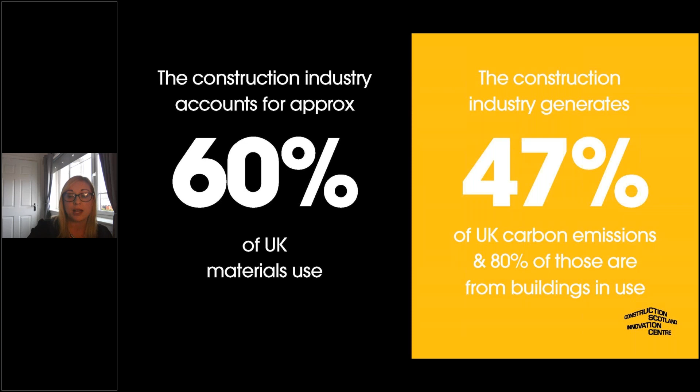And really, when we move into the next chapter of our delivery within CSIC, the net zero carbon agenda at a government level is absolutely crucial and core to all of the activities we take going forward. When we consider our impact within a net zero carbon potential, we see that construction, our sector, uses 60% of the materials, but also creates 47% of UK carbon emissions. So if we change just a little bit, the impact in a positive way could be a lot.

We have 4 different streams of activity: digital transformation, advanced manufacturing, building sustainably, and culture. We see these as the core pillars that underpin net zero carbon change for our environment and for our industry. Some of our activities take a different shape and form depending on the nature of the needs.

Our connected ecosystem, very much so around the network that we've been establishing over the last 7 years, and using our network in Scotland, UK and beyond to really push industry in the right direction and open up opportunities for everyone. Collaborative projects take the shape and form of innovation funding that we have that's available to apply for. Again, industry-led, but we buy out the academic expertise with one of Scotland's universities to support the progress of your project.

The Innovation Factory we have in Blantyre, whereby we are unlocking accessibility to a number of pieces of equipment centred around off-site construction and sustainable materials. And that equipment is available for everyone and can be used by way of commercial funding, finance, or through funding from other sources. So we can create a position of being a research partner if you are going for larger bids, and draw on our expertise within the Innovation Factory to progress your innovation projects.

And Future Skills is really supporting our industry to move in the right direction and address some of the skill shortages, in addition to some of the commercial challenges we have in keeping our skills where they need to be, whilst filling the gaps and some of the new skills that are developing with the change and progress of our industry.

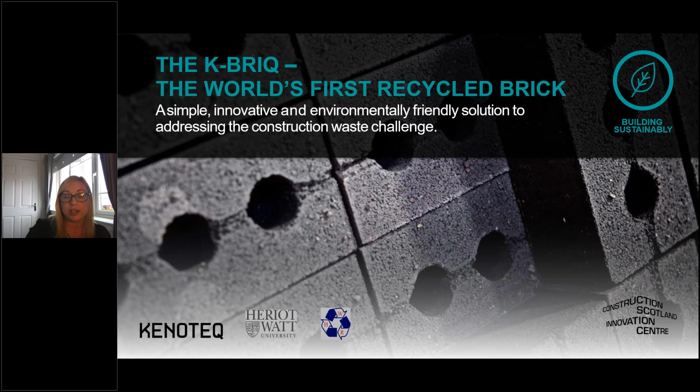Some examples of our work: the K-BRIQ you may have heard of. It's had quite a lot of publicity. It's a brick made from 90% recycled, difficult to recycle materials. It's not fired, so there's significant carbon savings, and at end of life it's very circular. It can be broken down and created into a new brick, something that could really revolutionise how we build.

Offsite Solutions Scotland is a collaboration that was set up with a number of Scottish businesses operating within the offsite capacity, bringing them together to share the risks and reward for joint research and development projects, but also positioning them with a longer term view that they could collaborate as one business and move forward into international markets.

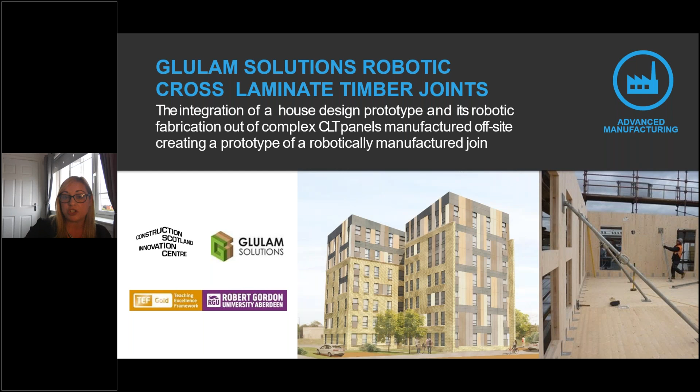Glulam solutions and robotic cross-laminated timber joints. We talk a lot about cross-laminated timber in Construction Scotland Innovation Centre. The reason being that unlocking the timber market in Scotland would have significant impact commercially, economically, and with the creation of a number of jobs. So we like to encourage projects with cross-laminated timber, testing the boundaries, testing Scotland's process to build. And this was actually the 7-storey flatted development in Yoker, Glasgow, using CLT and demonstrating how we can make this work in a Scottish capacity, but within a global marketplace.

Remote building inspection framework, very much assessing the developing needs of our industry, how we can be more efficient and impactful with our time and resources, but also acknowledging where we were within a COVID capacity and what can be done relative to BIM and remote working with more precision and accuracy.

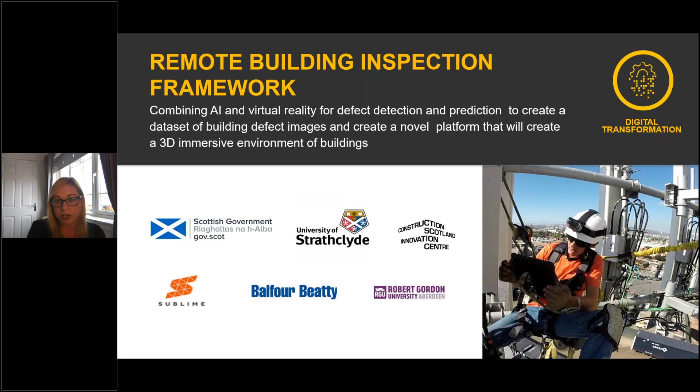COVID Smart, really a reaction to the COVID pandemic, whereby we created a resource centre where we could support our industry in moving forward as the change in regulations and change in restrictions came into play. And this is something that's still up to date and it's still open for all our industry to access as a resource bank, helping them decide what to do next and how to manage their operations appropriately.

And as you can see, we run a number of different types of projects, touching on a number of different themes. On the back of today's theme of flood defence, we would like to do a lot more within this infrastructure, and we hope that today showcases what can be done in a practical sense, with scope for future projects in an innovation capacity.

And just moving on to today's agenda, we are joined today by the McLaughlin Harvey team: Lee Davison, Head of Submissions; David Baskin, Senior Contracts Manager; Robin Erskine, Senior Contracts Manager; Adrian Pollock, Contracts Manager; and John McCreary, Senior Technical Manager. As I noted, unfortunately Dr. Valerikis has had to send his apologies, but we do have the presentation at hand and he will be able to answer any questions specifically on the water lab and the operations he has there.

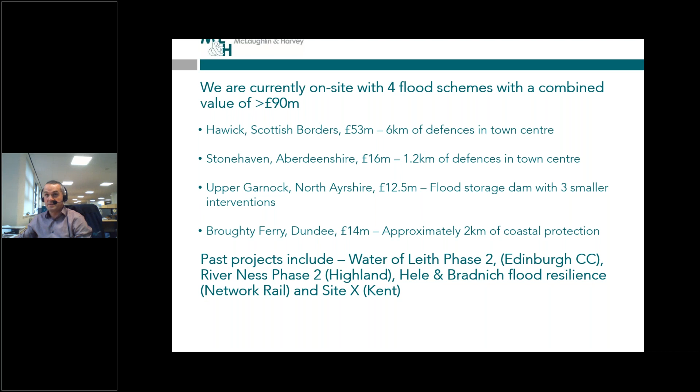So very quickly, a couple of slides just about McLaughlin & Harvey for those who may not know who we are. We're a privately owned building and civil engineering contractor. We've been around for just under 170 years, 700 odd employees. We have a turnover in the region of 500 million, 100 million or so of that is made up by civil engineering. Civil engineering team headquartered in Belfast, operating on projects throughout the UK. We also have facilities in London, Bristol, Liverpool, a major office in Glasgow, which a lot of the Scottish attendees here probably know, and a smaller office in Edinburgh.

As to what we do, as I said, predominantly construction, major building construction, civil engineering, but a little bit of facilities management and some specialist parts of the company. In terms of sector involvement in civils, subject to today, river and coastal flood protection schemes. What we're predominantly known for, and probably makes up 60 to 70% of civils turnover, is heavy marine civils in ports and harbours, a little bit of roads, a little bit of rail, and then on the building front, predominant areas of industrial, health, education, retail, sporting venues as well, a bit of residential.

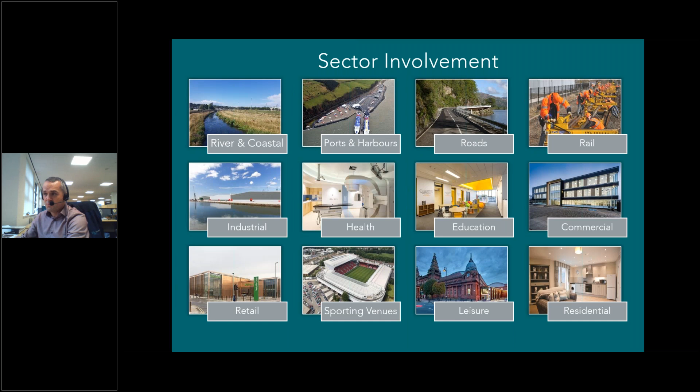Just to give a flavour for the sort of projects we have on the go, obviously the 4 projects we'll be speaking about today, and we're delivering projects all the way from Stornoway down through Scotland and England down to quay wall strengthening at Felixstowe. So we have a broad geographical spread around the country. So that's enough about us, and I will hand you over to Robin. The idea being we're going to run, broadband speed allowing, a quick drone footage of each job taken within the last couple of weeks, and then Robin will run through some of the points raised on the project.

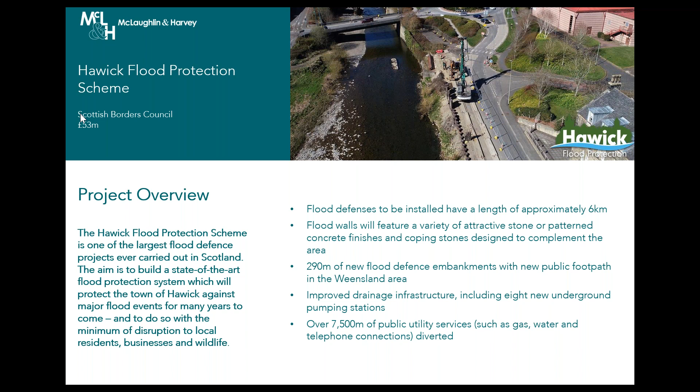The scheme involves construction of approximately 6 kilometres of new flood walls, generally sheet piled core with reinforced concrete pile cap and concrete stem wall, which is then cladded in various finishes of stone and concrete, etc. There's 3 new footbridges in the town to replace 3 existing footbridges, which link both sides of the river within the town. There's improved drainage infrastructure. There's 8 new surface water pumping stations to be constructed within the scheme. There's a new Scottish Water pumping station being constructed.

There's an upgrade of part of the A7 trunk road, which runs through the town, and lots of different bits and pieces that are basically going to make vast improvements to the town of Hawick. So this is just a bit of drone footage that was taken about a month ago.

This is the lower downstream end of the town, where we are currently working on both sides of the river. You can see there the abutments being constructed for a replacement of that footbridge that you see. That's an existing footbridge. New footbridges are being raised. You can see on the left-hand side there the flood wall construction is underway and ongoing.

You can see there's 2 large diameter pump chambers on the left-hand side beside our office and our compound there. That's one of the surface water pumping stations, one of 8 on the scheme. As you come on down, this is the Mansfield Road, Lower Mansfield Road in Hawick.

You can see on the right-hand side of the road there, the sheet piles have been installed. Haven't been able to install all those sheet piles to design toe level, but we'll come on to that later on. Left-hand side is the existing Scottish Water treatment plant, and where the crane is, that's the location of where we're installing the new pumping station, currently under construction. That's another compound in there that we have as well.

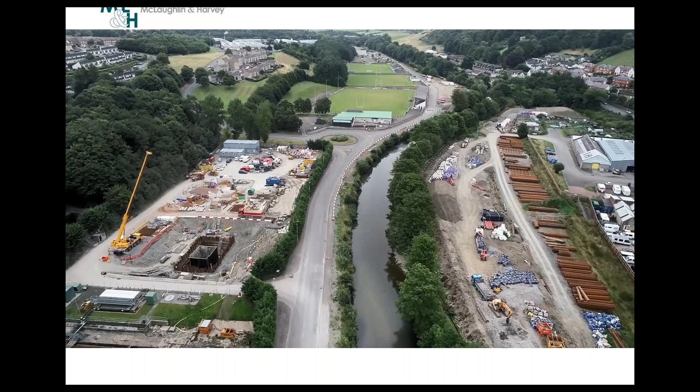On the right-hand side, you can see a large storage area. We've been able to procure all the piles for the scheme last year when we came to site, which is very beneficial, getting them at the right price and getting them to site early. We're also looking at Hawick Rugby Club there on the left-hand side, and the work's ongoing down there at the minute, just involving the outfall to the pumping station.

This is the middle section of the scheme. Apologies, this isn't in any particular order, but seems to have gone there, Lee. We can try and fast forward it a bit there.

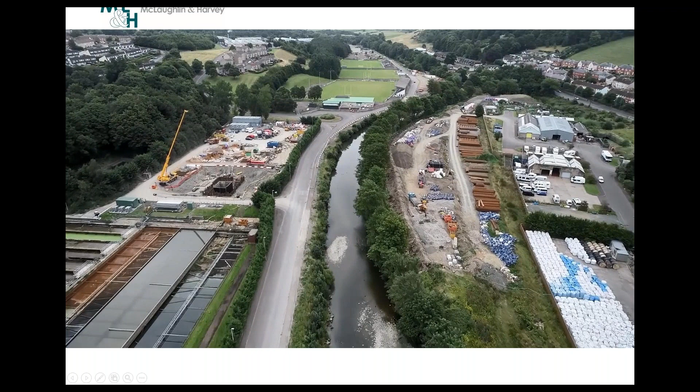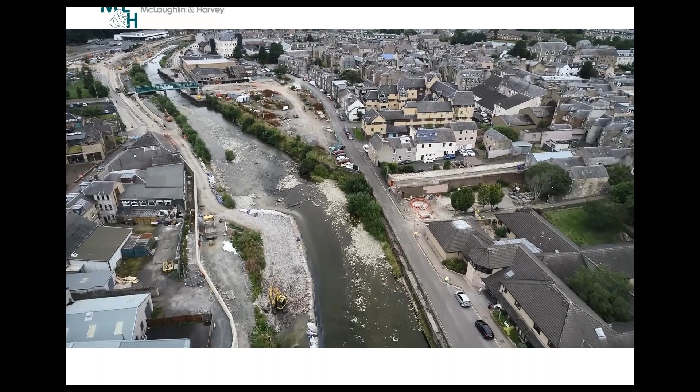Yeah, another wee bit. There's a large outfall from the wastewater treatment plant then down to that compound area behind the rugby club stand there. That work's currently ongoing. This is the middle part of the town, so you can see on the left-hand side, new flood wall constructed and clad in nice sandstone. That flood wall follows the back of the buildings up to Commercial Road, which is the A7 trunk road that runs through the town. You can see in the distance there the new green bridge.

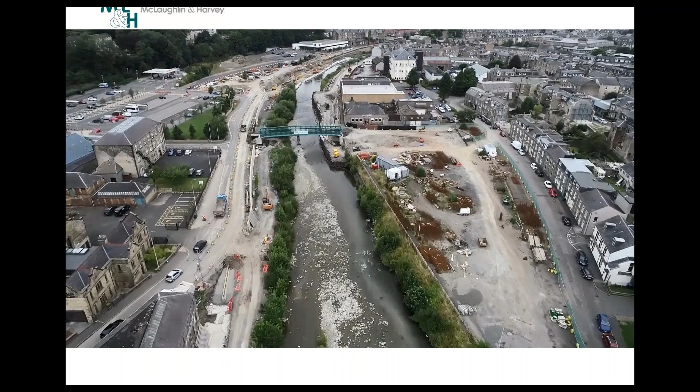That's one of the bridge replacements that we installed on the 26th of July, with the previous bridge, slightly smaller and lower, has now been removed. But there's still a lot of work ongoing just to link that bridge and get concrete ramps and things built and services diverted across the bridge.

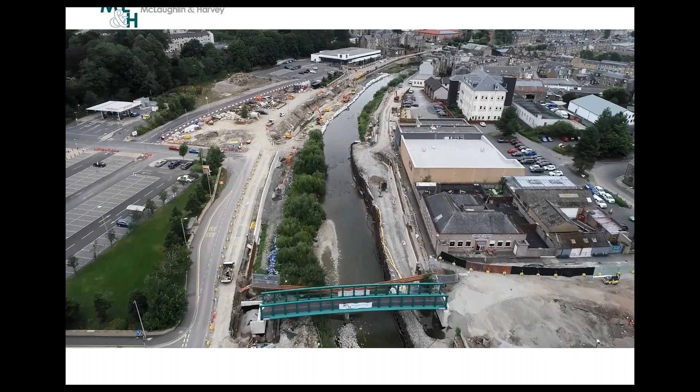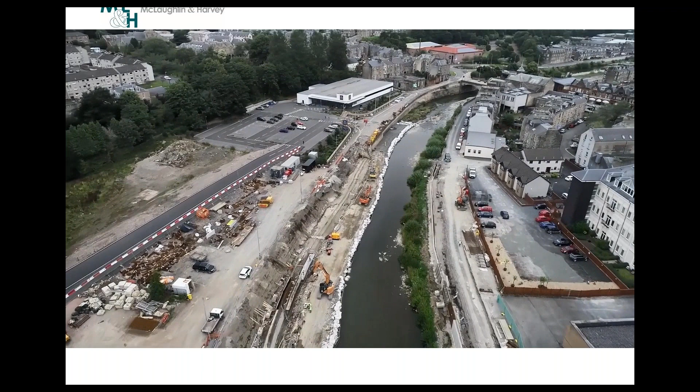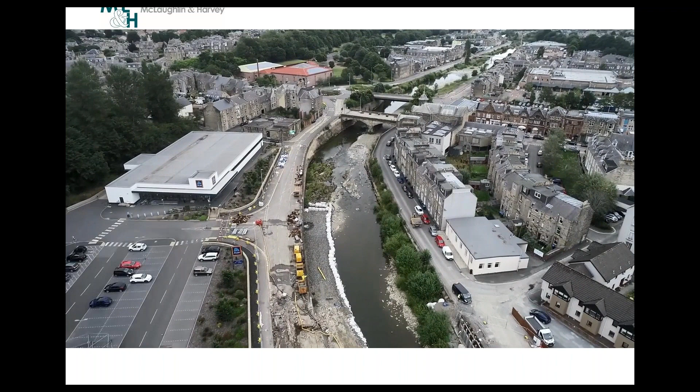Coming into work section 8, which has been one of the most difficult work sections to be constructed in the scheme. On the left-hand side there, it's one of the few areas where the flood wall isn't piled because we're down on bedrock, but there's a deep gravity retaining wall being constructed there at the minute from the river. So there's lots of constraints with working in the river that we'll come on to shortly after. But yeah, that's one of the most challenging areas.

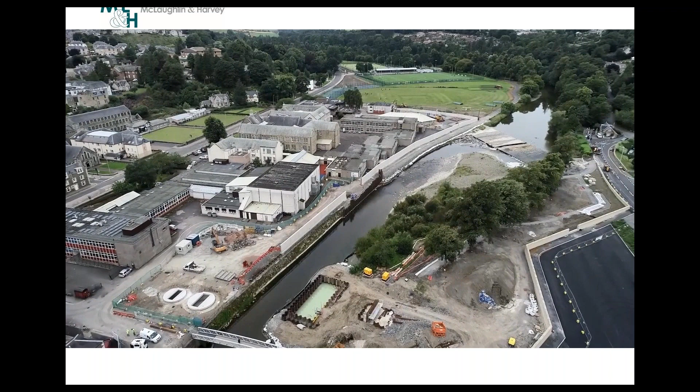This is looking upstream then from that middle section. That's Hawick High School on the left-hand side. You can see the concrete flood wall has been constructed. There's a gap there because there's some additional works to do there next year. But we have that flood wall constructed right round the Hawick High School.

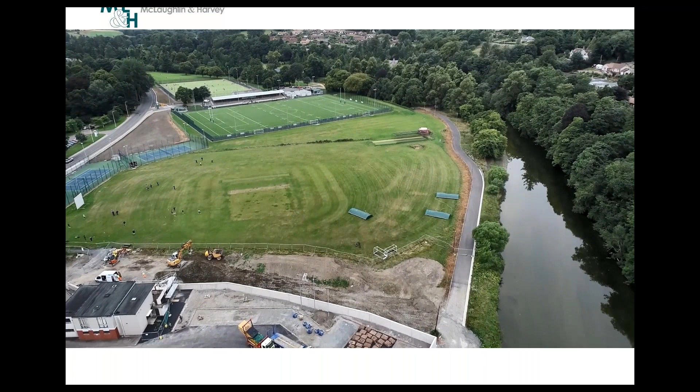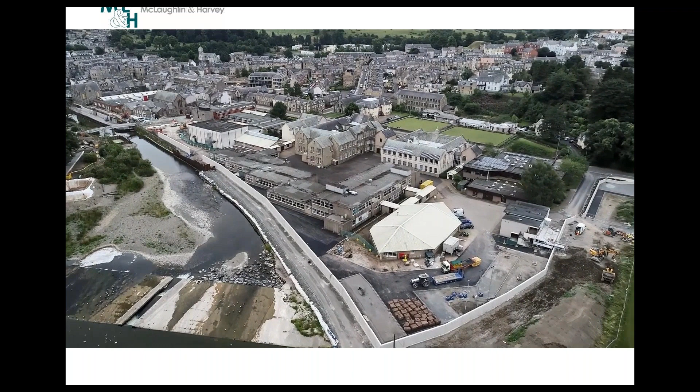This is Hawick Cricket Club. So the wall turns left there at the cricket club. So that cricket club is designed to flood. Footpath where the cursor is there is part of an extensive active travel network supported by Sustrans, which links footpaths in different areas across the town.

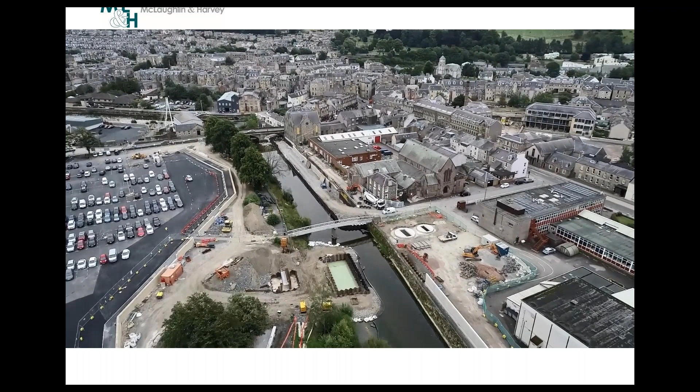That's just looking back the way. On the left-hand side, we've got the Common Haugh car park where we have the flood walls largely finished. You can see a coffer dam in the middle of the river there. That's a central pier construction for, again, a new replacement bridge linking the car park to the school. That's just looking back to the middle section that we've just been through.

If anyone's noticed, there was a building that collapsed in Hawick in February 2020. That's been demolished as part of the scheme as well, or partially demolished. This is the western tail end of the scheme on the A7 trunk road. Flood walls are all complete in there, and we're sort of at the stage of finishing works, landscaping works, some road works, accommodation works around the cricket club, which is just to the left of the tennis courts there.

The cricket stand to go in to basically link the cricket club to the wet side of the flood wall. So to say, that footage is all taken about a month ago, and there's been lots of work ongoing since then. So hopefully that wasn't too quick.

But just in terms of the scheme, it's a client designed scheme by Jacobs. Jacobs are on site with us, working as one big team, and things are going pretty well. We commenced on site in July 2020 with our setups, and construction work started at the end of July last year. So we're about a third of the way through the scheme at the minute, and we have about a third of the scheme actually constructed. We're slightly behind where we had intended to be at this point due to some of the constraints with working on the river. But as I say, we can come on to that.

Several areas, as I mentioned, for storage of materials. The site has also been divided up into flood modelling cells, which allows Jacobs to look at the flood risk management as we build the scheme over the 3 years that we're going to be in Hawick. We've also split the scheme into approximately 40 work sections, which makes it easy in terms of programming and planning our works. It just makes the whole scheme easier to manage from a construction point of view.

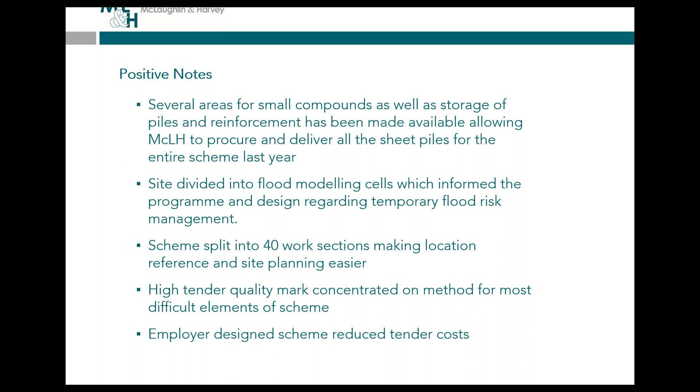High tender quality marks were concentrated at tender stage on methodologies for some of the most difficult parts of the scheme, for example, the work section 8 gravity retaining wall. There was a detailed methodology put forward at tender stage as to how that was going to be constructed. Not saying it's being constructed in that particular methodology, but that was good. And as we mentioned, it's an employer design scheme, so reduced tender costs. Move on, Lee.

Lessons learned in terms of the scheme. As I said, about 35% of the scheme is being constructed from the river channel. The constraints of working in the river channel are quite stringent, with the main works only permitted between the 1st of May and the 30th of September each year.

So we're here for 3 years. It really only gives us 3 summer periods to construct 35% of the scheme, and that 35% is the most challenging part, because we're working in water and we've got all the environmental constraints that come along with that.

So in order to do that, we have to install temporary works platforms. Basically from the 1st of May this year, we were in several areas constructing temporary works platforms for piling rigs and excavators to go in and put piles in and dig out for pile caps and reinforced concrete.

So when you take that into consideration, the 3 to 4 weeks in May to install your temporary works, and then another couple of weeks at the end of September to start taking them out, which is the stage we're at now. We're starting to take out platforms on the river from the end of this week into next week and the following week. It only leaves a 4-month window of actual construction works within the river.

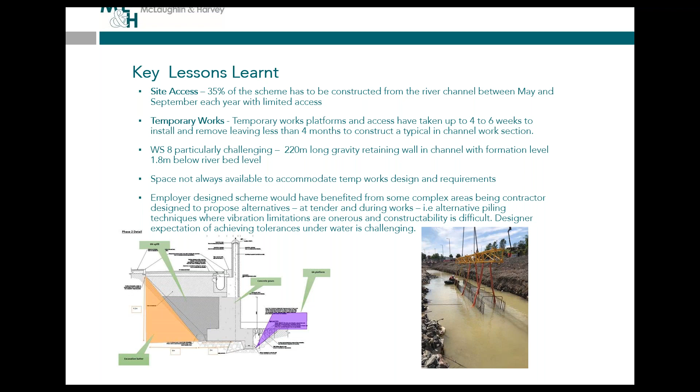As I said, there's lots of environmental constraints as well. The Teviot River is a designated SAC and SSSI, and it's a rich habitat for salmon and lamprey, which I'd never heard of until I came to Hawick. Quite an ugly looking eel type fish, but they're protected and we need to respect that.

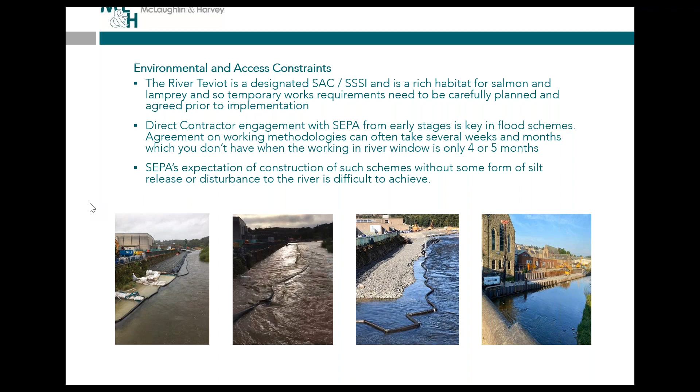And with the installation of those sheet piles, we thought the sheet piles would contain that silt, but the sheet piles didn't contain the silt. The silt's that fine that it's been able to make its way out through the clutches of the sheet piles. So that's been a challenge, and it's been something that SEPA have been on our backs with in terms of managing this and reporting silt and sediment releases into the river, which I have to say throughout the summer there's been several minor silt releases in the town, but when you are digging through natural riverbed material, it's near on impossible to avoid.

There's very stringent vibration limitations within the contract for installing those piles, but it was a real challenge to install sheet piles and stick within the sort of 2 millimeters per second vibration limits. We looked at other piling techniques such as pile pressing, but lack of room to do that and existing ground conditions just didn't make that a possible methodology for installing those piles. So again, areas like that, there are other options for sinking piles and different options that would maybe have less risk of causing damage to the building.

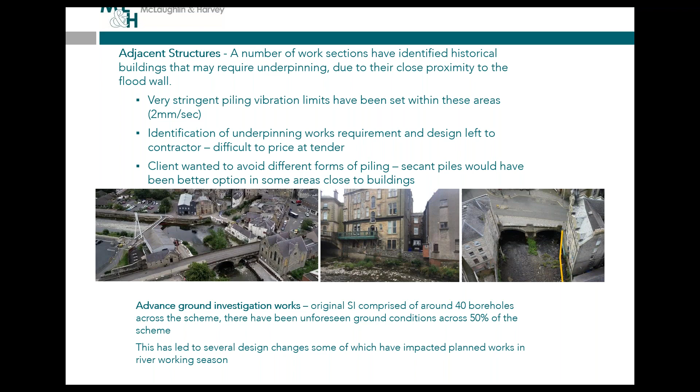Other areas have been redesigned, have required anchor ties into rock and stuff. So, you know, there's lots of issues that I don't know if potentially more site investigation or more boreholes may have picked up on previously at design stages.

Lots of different finishes within the flood wall, as I touched upon. Some of the flood walls are plain concrete finish. Some of them have a Rekli form liner finish, which is like a ribbed, vertical rib pattern. And some of them then are clad in sandstone, like what you can see in the photos attached. The photo on the right-hand side shows some of the walls that are clad in sandstone on one side and plain concrete or Rekli concrete on the other side. So there's lots of different finishes.

And again, the stonework has been challenging too, to get to the expectations of the council's landscape team and the designer's landscape team. It has been quite onerous achieving what everyone expects. The copes themselves have been difficult to manufacture. It's natural stone material. There's going to be variations in colour, variations in the material when the likes of those half-round copes are split. The stone will split whatever way the stone wants to split. So there's been a fair bit of wastage in terms of materials that haven't come up to the required standards and quality.

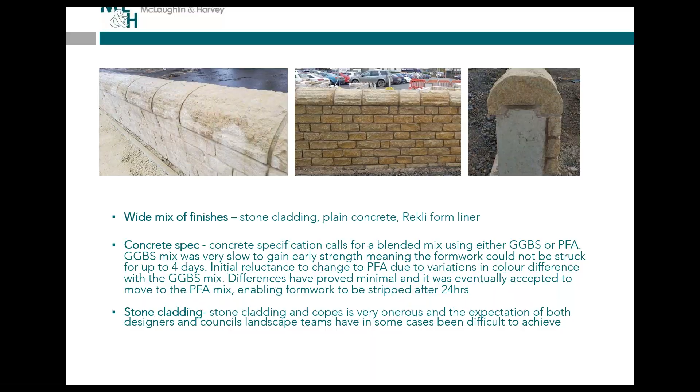But that, I think, Lee, is the last slide. So I'm going to hand over to David Baskin to talk about Stonehaven now. Thanks.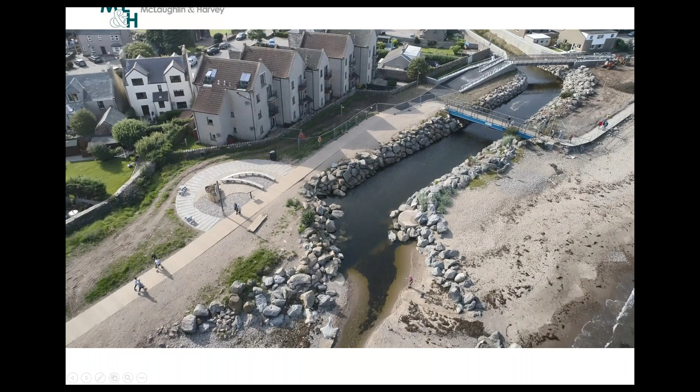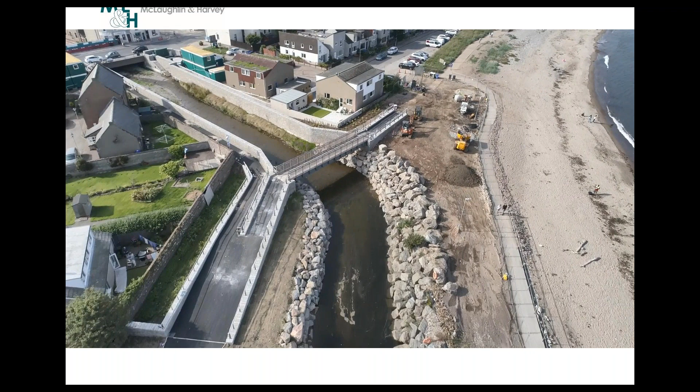Removal of the island downstream of the Green Bridge was also carried out. We installed 2 higher capacity culverts on the Glaslaw Burn up at Lowood Road and the culvert under the cairn. This is a bit of drone footage taken about a month ago. You can see there that first blue structure is a temporary footbridge, and we've also got a 450 pumping main diversion on that while we carried out the main works. This is section 4A by the beach. It's a tidal area as well, which raised some problems when you had winter events and backed up the flood, exacerbated the flood.

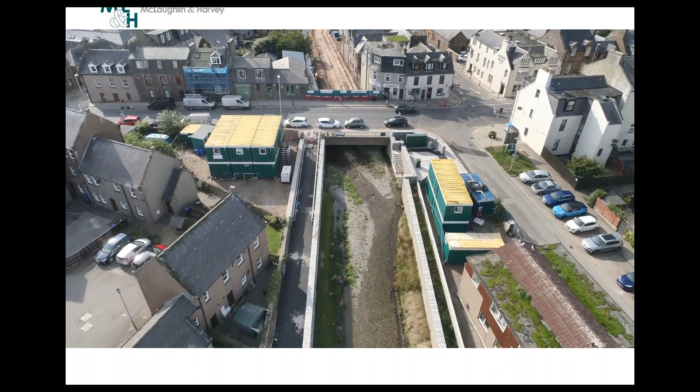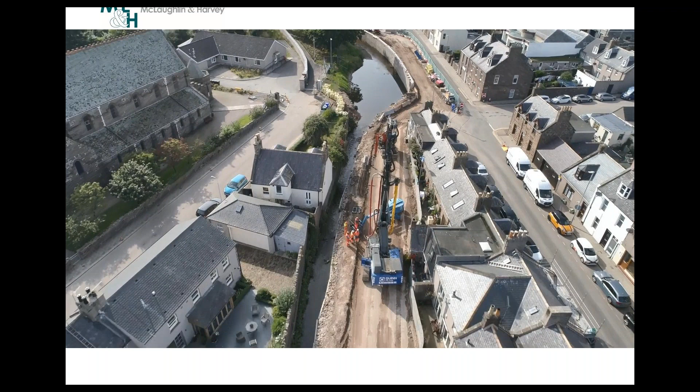We originally had our compound where the Aberdeen bypass site was, and then we moved it down into the town. We're just coming through section 1B now, which suffered some delays. And we started piling in there. It's a very tight area. You can see the kind of space you have with the 55-ton rig.

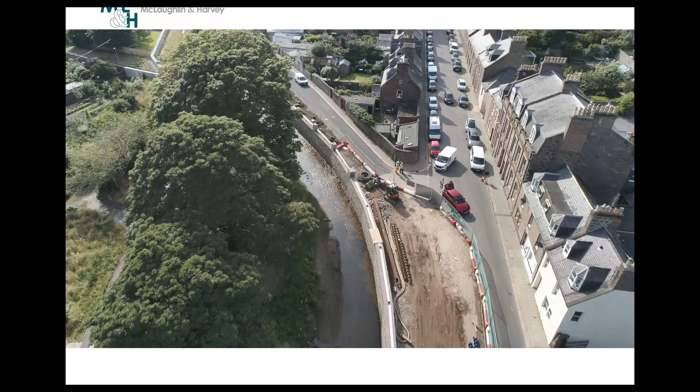The white bridge is just where those sandbags are. That'll be constructed when we complete 1B. We're moving up through section 1C now. There's a number of glass panels and self-raising barriers as well. The walls themselves, some are gravity and some are piled structures. It's quite a narrow corner.

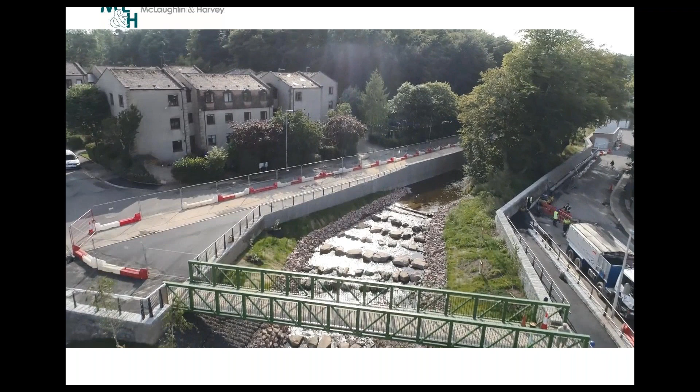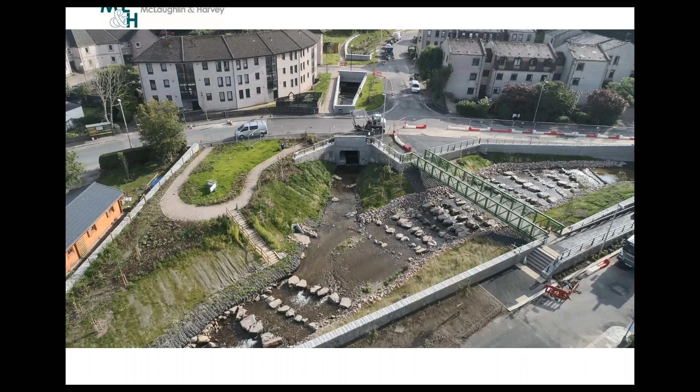This is the intersection of the two streams here where we put in the new green bridge and the flow control structures. You can see those rocks there are dowelled into concrete beams cast in the riverbed. The wall closest to us there is sheet piled, with a capping beam and RC stem wall. The walls are clad in a granite material by and large, and then there's some Reckli formliner concrete finish as well on the culverts.

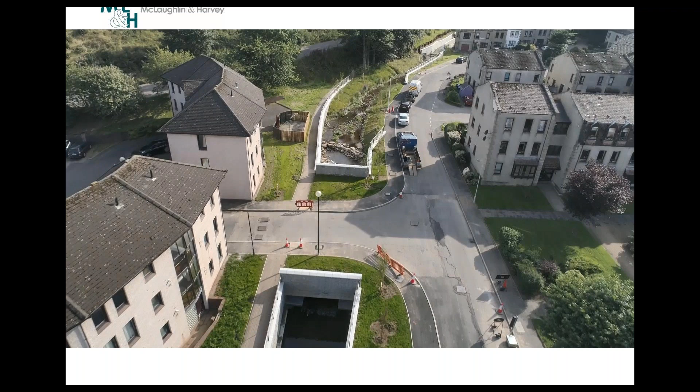This is coming up at the area 2G, Carron Gardens, which is quite a flashy area to flood. There were several issues there with flooding, just trying to get it done. You can see there the working space again is very tight between the main road and the properties, and there's quite a steep embankment there that we had to put some temporary sheet piles in that actually ended up remaining there to give some additional stability to the road, as there were some concerns there.

The key points on the scheme: it was a full client design by Mott MacDonald with some contractor designed elements. They were the bridges. It commenced on site in January 19 and completion is due next year. The positive actions with stakeholder liaison: there was extensive support for the scheme in advance of the works. The community has been quite supportive overall. You'll always get some people that aren't supportive of it. They're usually the people that aren't affected when the area floods.

Clearly defined parameters for in-channel working. That was very, very clear in the contract, with 1 metre above bed level plus 50% of in-channel working width. Experienced client team, they had good experience of these flood schemes, and the project manager has been involved from its conception. The use of the off-site compound, as I said, was good. It was a good storage area, and it enabled us to get a lot of materials called in early and take away some of those market risks.

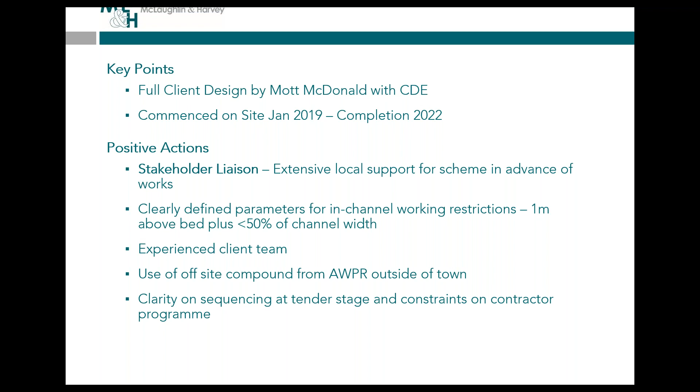So I suppose the key lessons on the scheme: temporary works constructability should be looked at and considered in more detail by the designer at an early stage. Consider contractor input at early stages. Sometimes where space is at a premium, the temporary works and the permanent works are very intricate. And in 1B, for example, there's a culvert being constructed, but in the temporary state, that culvert will have props from each of the capping beams that help retain the existing structures there.

Also, there's a number of areas where the permanent works was designed with CFA piles because of drivability issues for sheets, but in a lot of those areas we needed sheets for the temporary works to allow for the in-channel working to get down below riverbed level, so that obviously needed a bit more work.

Explore ways of designing walls on top of riverbanks rather than below riverbed level. Concrete works in the wet to be avoided. I think we all know we'd love to work out of the river. It's not always possible, especially when you have a very narrow corridor. But where we are in the wet, we should look at precasting and aim to maximise the opportunities of precasting walls and capping beams and things like that that we've done on other schemes.

Utility diversions: complete more of the utility diversions before the main construction work starts. We had a number of utility diversions to do, which involved gas, water, electricity, and if they could be done in an advanced works package, that would be helpful to the programme as well. Sometimes when we're dealing with utility providers, it's very difficult to get everybody lined up when they're needed.

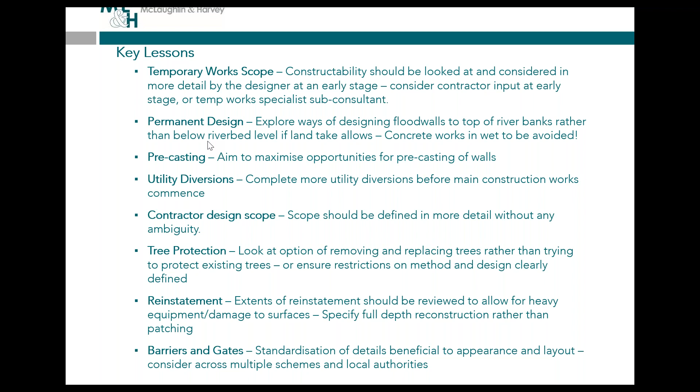The biggest thing that I've experienced here is space for piling equipment. You can see there that piling rig is approximately 60 tons. It's driving piles about 500 mil from stone built buildings, which can prove very, very risky. We have changed the piling methodology there and the types of piles in this area. So when we did the center line of the culvert, if you can see there probably in the first photo just below the concrete pipe, we just used traditional CFA piling methodology. But for the piles close to the existing buildings, we've opted for a cased CFA option, which reduces vibration and reduces the risk of overflighting as well.

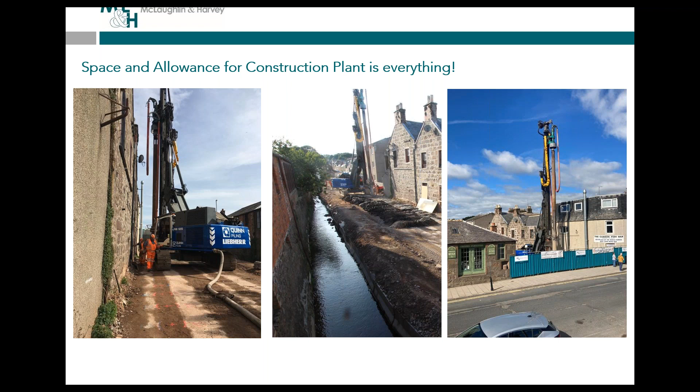But the big lesson to be learned, and I know we can only build in the footprint we have, is the type of construction in those very, very tight areas. We can't even get rigs past each other there. We had also tried to look at putting a second rig in there to improve on the program, but it proved impossible with concrete supply and different elements of plant that's needed. So a big key is the working corridor for the works, especially in areas where you have old buildings that would be at risk. Okay, Lee.

That's the main thing for me. Just to note, working space and precast where possible will be my two main lessons learned from the Stonehaven flood mitigation scheme. All right, thank you.

Okay, I think everybody can hear me now, hopefully. My name is Adrian Pollock and I'm the Contracts Manager working on the Upper Garnock Valley Flood Protection Scheme. It's a project for North Ayrshire Council, valued at just over 12.5 million.

So as Lee noted earlier on, it's a bit different from Hawick and Stonehaven in the sense that while some areas are similar and you have the in-channel working, ultimately the main part here is a flood storage reservoir, which is up there, as you can see, in Area 1, just north of Kilbirnie town. The other areas, Area 2 down in Kilbirnie and Area 3 in Glengarnock, which is on one of the tributaries, the Powgree Burn, are more traditional in-channel working, reconstructing new flood walls and the like. And Area 4 down in Dalry, we have some sheet piling methods. So just a quick video here to give an overview of the project.

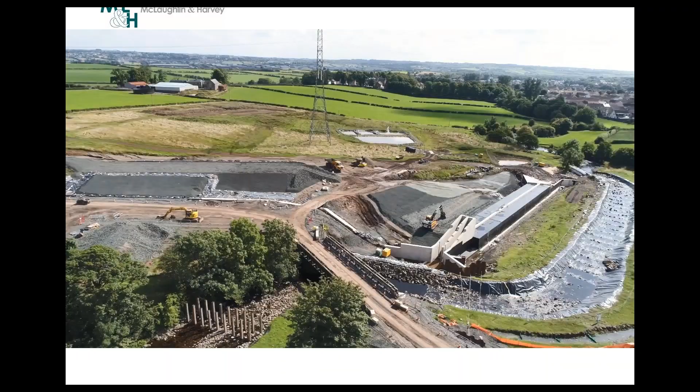As you can see there, the sites are located southwest of Glasgow in the Garnock Valley, the 4 areas identified there, as we mentioned. Area 1 is the flood storage reservoir just north of Kilbirnie. It really consists of an earth embankment which forms a dam within the Garnock River, and ultimately this will impound the water and restrict flows downstream into Kilbirnie and onward. The embankment consists mainly of imported material with some site processing being used where possible. There are 5 main materials that make up the dam itself.

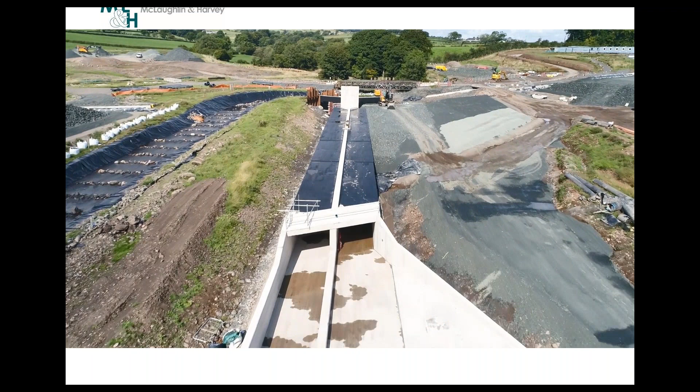In order to access, we have a temporary bridge there spanning across the river to give us access to both sides. And we had to divert the river there to allow construction of the precast culvert, and you can see the inlet structure there, which ultimately is the flow restrictor, and it causes the impound of water. The site's about 10 hectares in size, and that allows for the dam, the material storage processing, and the surface water management.

The second area is Kilbirnie town itself. This is more in-channel working, although there is an earth embankment there, as you can see in the near ground, which protects the Paddockholm industrial estate. There's a new footpath constructed on top of that as well. Another part of this section is a replacement of an existing flood wall. Whilst it has an in situ foundation, it has used a modular precast system for the actual flood wall itself, as you can see there from the image.

The third section then is third areas in Glengarnock and the Powgree Burn, which, as I said, is a tributary. It's quite a confined space, this one. We're working between the Glendale Arms pub and also the Network Rail railway track there. The main objective there is to replace the flood wall.

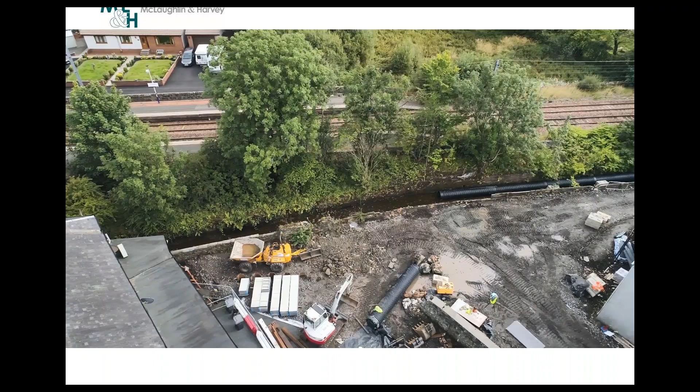To do this, we've had to pipe the existing burn there to create a dry working space. This one's currently ongoing there, as you can see. It's quite complex technical works in this area just to support the existing buildings, and deep excavation was needed, which was difficult, and we'll talk about.

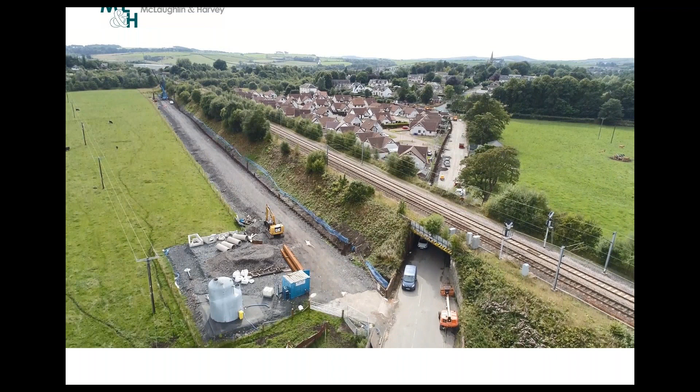So area 4 then is the Dalry defences. There's some works in the DSM factory, which is in the background there, mainly concrete retaining walls and flood bunds. In addition then, along the Network Rail embankment, we've got 320 metres there of sheet piling. That's really to protect the rail embankment, and was installed using vibratory methods, and that was successfully done along the embankment, complying with the various restrictions that Network Rail imposed.

Also, there's the Beith Road flood wall, 220 metre sheet piles there. We used pile press methods, hydraulic press, obviously given the close proximity of the houses. And just finally down in that area then there's about 1,000 metres of embankment regrade works there again to stabilise the total embankment during the flooding. So that gives sort of an overview just of the site as it is.

So I suppose moving on then just quickly to the key points of the job. It is a client design, and that was completed by AECOM on behalf of the council. Some contractor designed elements within that, primarily the fish pass up at work unit 1 at the dam, and also down at work unit 4. There were 3 pipe crossings where we had to span Scottish Water infrastructure, sewer mains and the like, and there's a grouting design required around those. So albeit there was concept designs in place, there was ultimately a contractor design to take those forward.

Work commenced on site last year in August and runs through to springtime next year, 2022. So yeah, similar to the other ones, some good positive aspects, and just to run through them quickly. In terms of landowner engagement, particularly up at work unit 1, which is the dam, and down at work unit 4, there was a substantial land take required from local landowners.

We found that the client or the council had fully engaged with all the landowners via various agents, and the work scope was clearly understood there, even from a construction phase perspective, and ultimately there were land agreements in place which were quite robust, which meant we haven't to date incurred major issues with the landowners, which has been good. They've also identified the need.

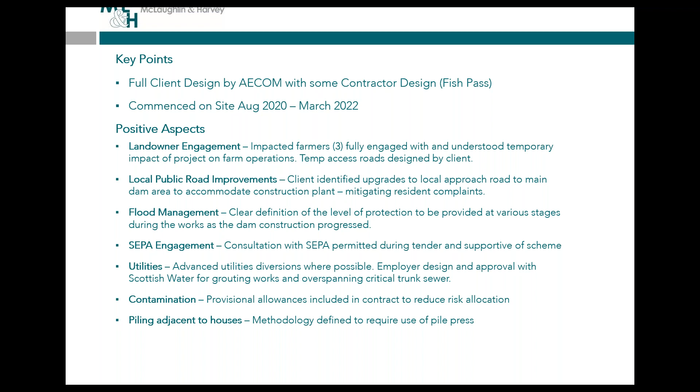And then, as I say, probably the last one there, piling adjacent to houses. So again, methodology was clearly defined within the contract documents or the tender documents, with the use of the pile press for the section down in Beith Road. As you can see, they're working in very close proximity to the adjacent properties.

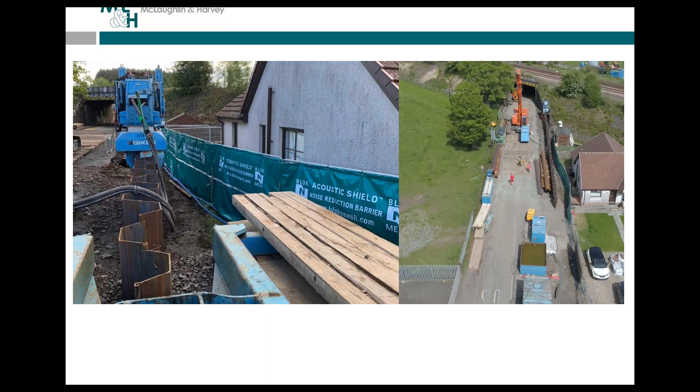So thank you, Lee. Next one, right?

Okay, lessons learned then. I think probably the main ones here, concerns that as a contractor, when we sometimes see open tender jobs, I wouldn't say put off, but we sometimes look at them a bit more cautiously in the sense that they're open to possibly less experienced contractors. Particularly in this one, there was quite a Network Rail interface down in work unit 4.

So you're always aware that there's somebody with less awareness than we may have who can come in and undercut or underbid and potentially ultimately cause problems later on. So that was one thing, we prefer select lists and the like, as opposed to the open tender jobs.

Material specification, and this one particularly, I'm probably referring to the dam itself. As I say, the main dam material was primarily imported, albeit we have worked with the council and we're trying to reuse and process where possible and relax specifications where at all possible. However, generally speaking, that was the materials that were selected. They're an owner's specification, and what we found was they're not readily available from the local quarries.

Which ultimately resulted in increased haulage, and we had to take on quite a bit of processing as well, which in turn had an impact on carbon footprint and ultimately the cost, because it wasn't the material that was just readily available. There may be design reasons for that, but it's just something to bear in mind, to have an element of flexibility there at an early stage to try to make use of what is readily available to you, either on site in terms of site won or else local quarries.

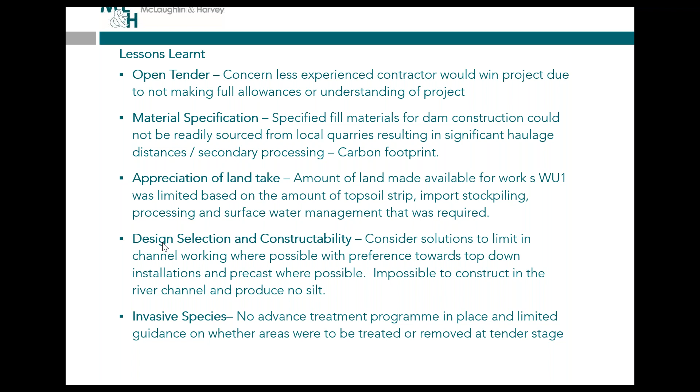And in invasive species, there was a biosecurity management plan in place. However, there hadn't been any advanced treatment, and I appreciate that could be down to procurement timescales and one thing and another. But where you have the opportunity, it's cost-effective to get in there early, set up treatment plans over the years leading up to construction, which ultimately reduces the cost for disposal off-site.

Engagement with Network Rail, this was something that we probably struggled a wee bit with at tender stage. We were unsure. Engagement with Network Rail was limited during the tender period, and it wasn't really clear what their working restrictions were. Whilst we have some Network Rail experience, different regions tend to operate slightly differently. So the requirements that they were going to put upon us in terms of possessions and isolations of the overhead electric equipment, we weren't entirely sure how that was going to work. So I think a bit more early engagement with Network Rail would be beneficial.

Advanced service diversion, what I mean in this one is whilst advanced services were carried out well, the one thing that possibly could be done better is the consideration of where the service companies are actually putting the diverted cables. On occasion, yes, they moved them out of the permanent works. However, they were moved within where the temporary works were needed, in particular things like piling mats and crane pads. So it's important when you are diverting services to consider where the temporary construction is going and make sure that they fall outwith that.

So procurement aligning with programme, a general one that probably applies to most flood schemes. Ultimately, the award date of the contract's key. With the award coming here around early summer, it allowed us to get the river diversion completed before the SEPA restrictions that came in at the end of September/October time. That was okay. There wasn't much room for float, but it was delivered. However, it then meant our bulk earthworks took place throughout the winter. So an earlier award in this case would have assisted us in getting the bulk earthworks completed in a more summer period. I understand there are constraints with that, but it's something to look at.

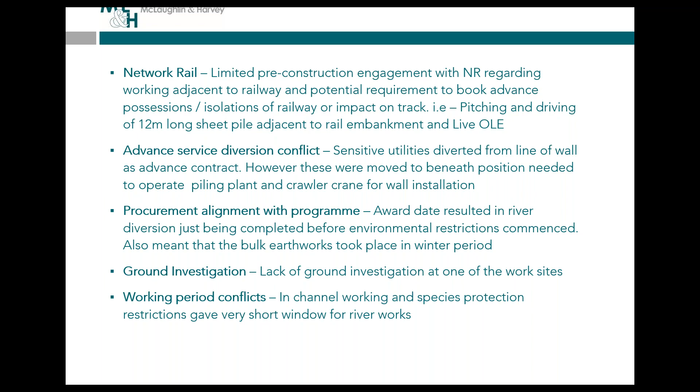Hello, can you hear me all right? Yep, John, we can hear you fine. Thanks. Okay, that's great.

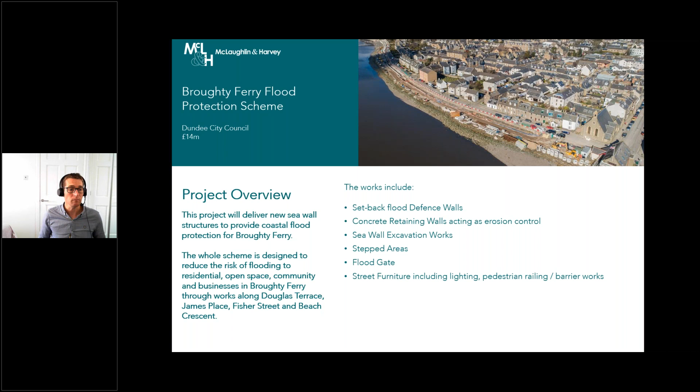I'm just going to have a quick run through Broughty Ferry. The flood protection scheme is currently on site in Dundee, and I'm primarily going to focus on Douglas Terrace, one of the areas. But a quick overview of the project. Primarily, it's a coastal protection scheme because it's in the estuary of the River Tay. It provides a new seawall and structures for coastal flood protection, and the whole scheme is designed to reduce the flooding risk to residential houses, open space, communities, and business properties. And we're just going to run through a quick video.

Essentially, it runs the length of Douglas Terrace, which is almost about 800 meters long, and then it moves into section 2 works, and then on through to Beach Crescent. This is primarily Douglas Terrace, which is already complete.

So you can see we have to deal with the tide fluctuation on a daily basis, where the works are constantly getting wetted and dried, and we've had to put in some temporary working platforms to allow us to construct the works. And essentially the main project itself was a build out of approximately 4 meters from the existing revetment out into the sea or the estuary, and then there's some scour protection works along the front, which ultimately creates a new promenade and an active travel network that stretches the whole way into Dundee itself.

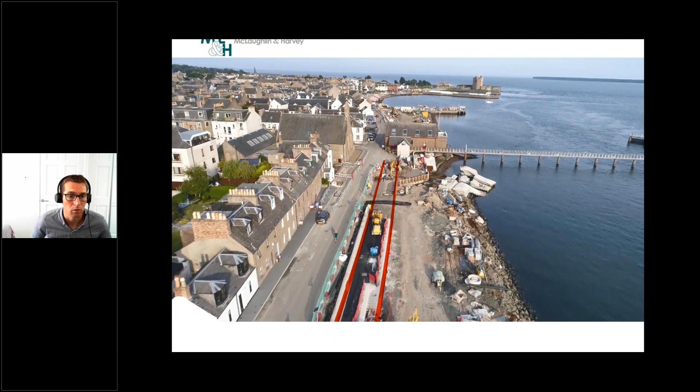So again, just some interfaces with some of the local infrastructure and the RNLI that had to be kept live during the project. Fisher Street, again, a lower level retaining wall and retaining some of the green space to the front. And then Beach Crescent, which is a terraced area, hopefully to allow the locals to eat their ice cream on a nice sunny day in Broughty Ferry. And again, that's just some more piling works and temporary access platforms that we had to put in place to accommodate the works.

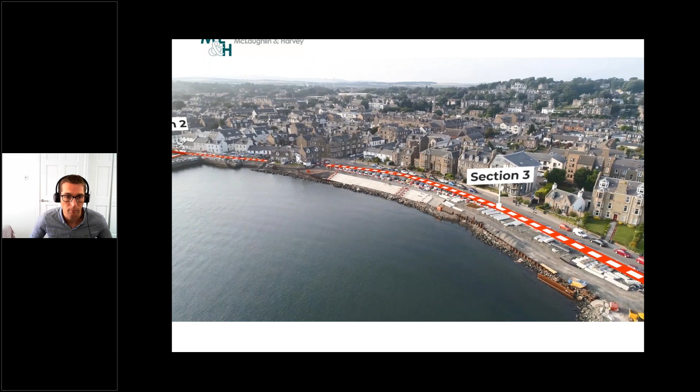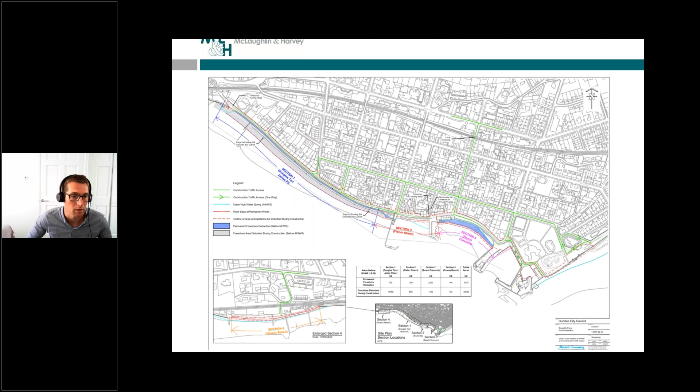So on the slide here, primarily the scheme's broken into 3 phases. Section 1, Douglas Terrace to James Place. Section 2, Fisher Street, and then Section 3, Beach Crescent. So just going to primarily talk about Section 1, Douglas Terrace. So the existing revetment that you can see is an old stone pitched revetment, probably in the order of 100 odd years old, with a footpath with no safety railing on the side.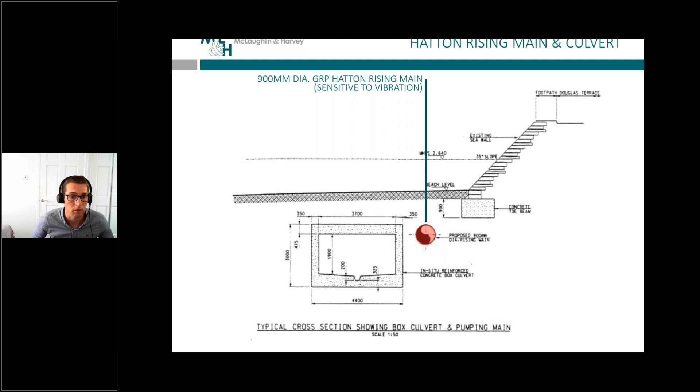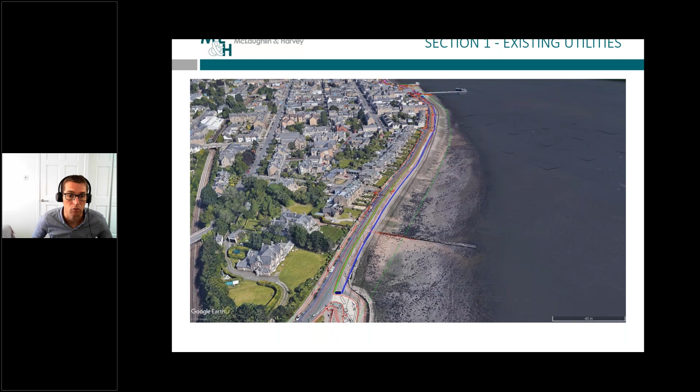And on the beach itself in the early 2000s, a GRP rising main was constructed and a concrete culvert to convey all the wastewater for the area down to a nearby pumping station and onto a treatment facility. The alignment of that culvert, the offset changes as you go along the length of the scheme, and as you get closer to James's Place, it gets quite tight to the toe of the new structure. So we did have some challenges in relation to how we would construct it.

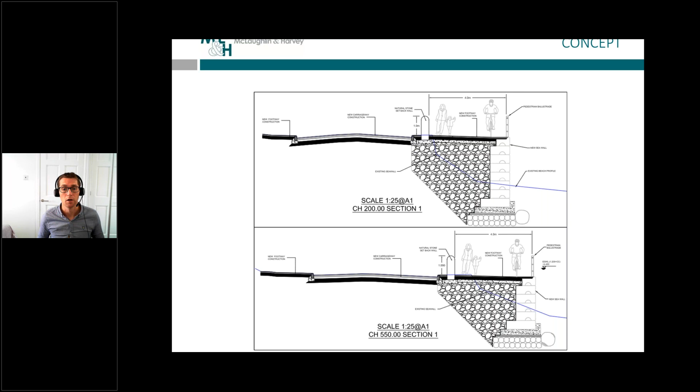The client's concept was to have a vertical retaining wall with a build out. So you can see the blue line there would be the existing revetment, and then we had a retaining wall, and then there was some coastal modelling carried out that identified potential scour that could occur up to maybe 1.7 metres below existing beach level, which was a key driver in the final solution.

And again, some of the challenges for the scheme: we were appointed to provide some ECI advice and support to Dundee City Council, and a number of previous contractors had formally priced the project, which exceeded the budget and made the scheme unachievable. And primarily they were going down a more traditional sheet piling route, where they wanted to install sheet piles to shore up the rising main, and the concern from Tay Catchment or Veolia or Scottish Water ultimately was that the GRP rising main is quite susceptible to distortion, and the vibration and potential piping could cause issues and cause that pipe to burst, and it's obviously strategically important for the area.

Again, the ground conditions are quite challenging there. You've got quite a lot of running sands, and there's been previous experiences of piping issues on that site itself. There was again a preference to omit vibro piling adjacent to the rising main. Again, local residents, some of the properties are quite close. Vibration was an issue when the culvert and the rising main were installed. Obviously, it's also a popular tourist area, recreational beach for Dundee, access, weight and height restrictions along the railway crossings.

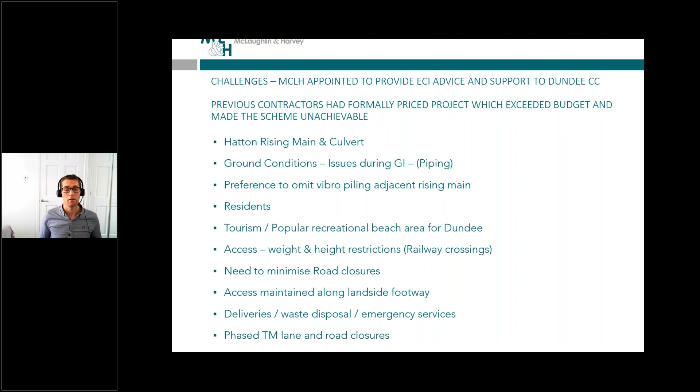There was also a need to minimise road closures, maintain access alongside the landside footway, because it is still used as an active travel route to get people into Dundee City. And again, we needed to make sure we accommodated waste disposal and emergency services, and ensure we had phased the works in such a manner that we had phased traffic management. These were key drivers for Dundee City Council as a client, and they would have led to us coming up with our final design solution.

And again, the coastal modelling study by others identified a potential scour of 1.7 metres on the beach, and then we also need to make an allowance of an additional metre, so any further scour or foundation needed to be set 2.7 metres below the existing beach level.

The challenges we had here would have been that we would have completely undermined the existing revetment, which was supporting the road network, and it had some challenges. I suppose one thing that can be a note here is we had some good dialogue with Dundee City Council on how best to approach this, but ultimately some very early stage and preliminary reports can put in notes of restriction that dictate how a design has to evolve over time, where in fact if more focused analysis was carried out, you may be able to relax it.

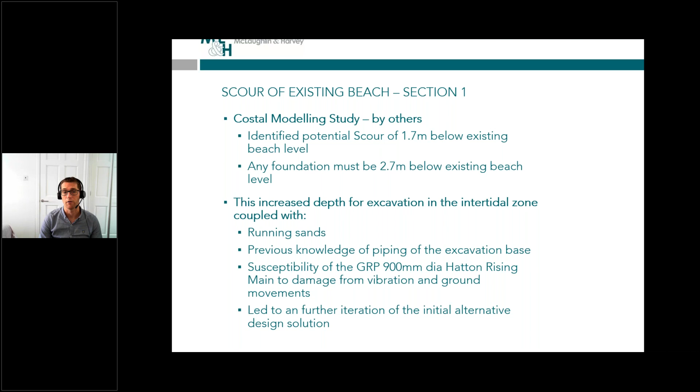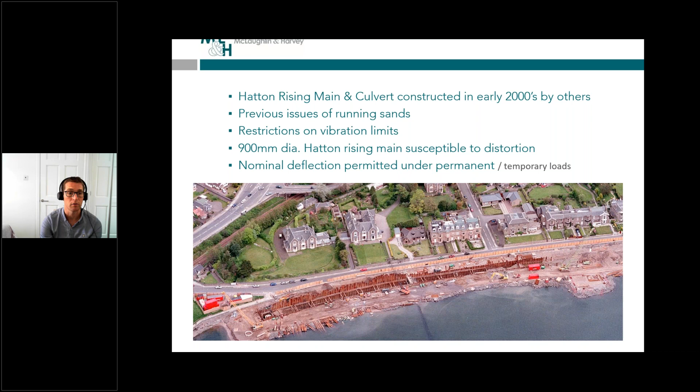And again, the Hatton Main, just as we're showing here, was constructed in the early 2000s by others. There was actually an instance of running sands on this site where unfortunately there was a fatality. So it was key for us to avoid the need to undertake deep excavation, and again to minimise the vibration for the Hatton rising main, because there was nominal deflections permitted.

So ultimately we came up with a solution, going back to what Adrian was saying, to try and use precast elements and avoid working at low level, because we were going to be in the intertidal zone where we were constantly being flooded out essentially. We came up with a solution whereby we installed a temporary platform at a higher level, which was about half a metre above mean high water springs. We then came up with a rotary bored piling technique, which significantly reduced any vibration, and we cased all of those piles to avoid any issues with running sands as we constructed it.

Then we excavated down locally, and we had a precast trough beam, which allowed us to pour the foundation for the wall itself. And by being able to quickly complete the excavation and drop in the precast and do a temporary backfill, that allowed us to provide temporary trench support, and it also allowed us to form the permanent works without the need for extended periods of time installing formwork and striking formwork.

Once we got the precast trough beam installed, we did an in situ pour, and then on top of that we placed a precast L wall, and the benefit again, it meant we got up out of the water zone and the flooded zone quite quickly to allow us to complete the works. And then we had an in situ capping beam on top of the wall, which tied everything together.

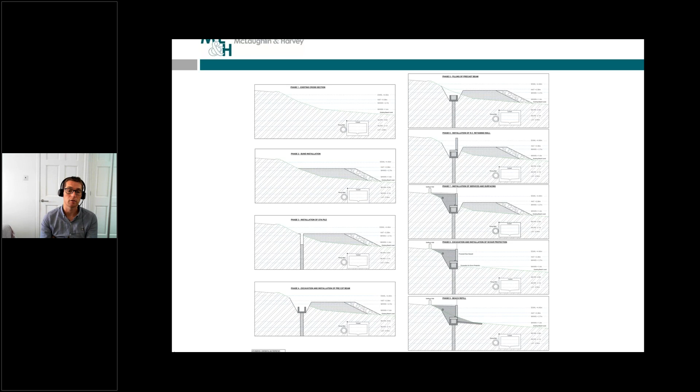I suppose one of the real benefits on this scheme, we came up with a solution to minimise the over reliance on the scour protection that we had to get down to the minus 2.7 by having a pragmatic view of historical studies and monitoring of the levels of the beach and the sand, and then by placing in a scour protection mattress, which has offered both programme and cost savings to the client.

And again, here's a quick cross section of the pile. You can see on the lower section the cyan coloured in situ concrete inside the U trough beam, and then the wall panel on top. And the wall panel on top was connected to the foundation pour with an in situ stitch, and then a further precast stitch at the top.

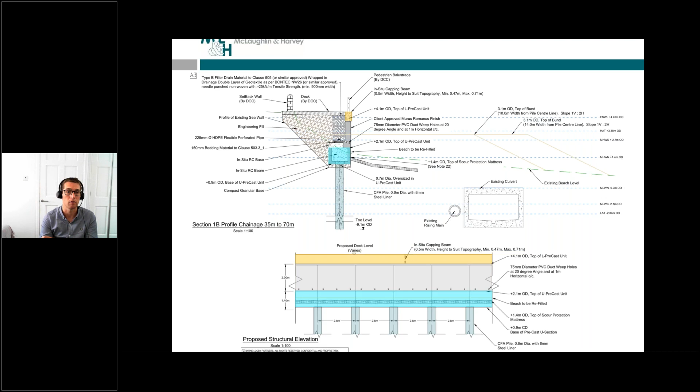And then we had further streetscape works or public realm to enhance, and the setback wall that you see here on the left actually also helped raise the level of the flood protection. So ultimately the small setback wall is the final defence on any flood events. And by using both walls rather than having one significantly high wall at the front, you get the benefit of the views out to sea.